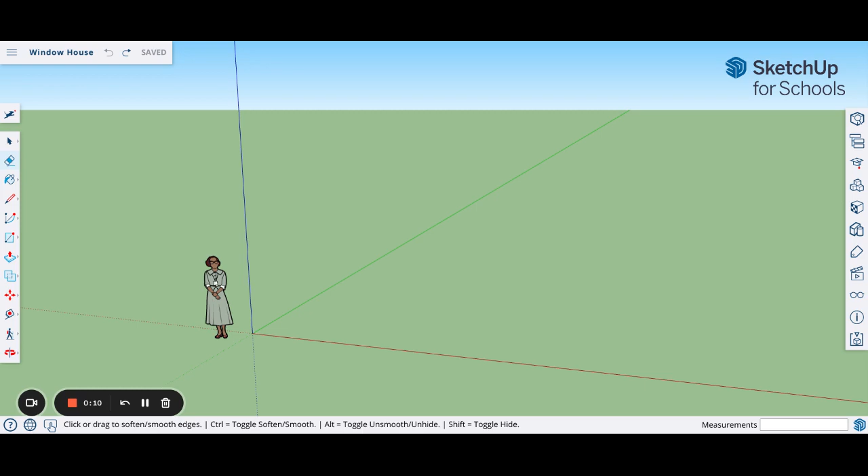We're going to get R for rectangle. We're going to start at our origin, click release, drag our mouse out, and place it again. And there's our rectangle for our base.

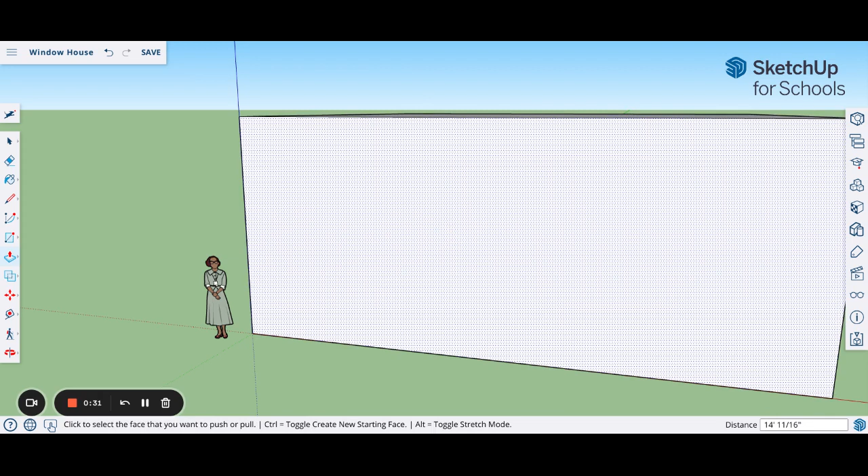We're going to get our P for push pull. We're going to click on that surface, drag it vertical again, and place it. Next we're going to zoom out a little, and I'm going to orbit.

There we go. Now we're going to get our arc tool, A for arc, that's a 2-point arc. We're going to click on this end, go in a little bit - yeah, that looks pretty good - and go straight vertical. If you're having a hard time going vertical, just hit the down arrow on your keyboard and that should inference lock it. We're just going to go till it snaps to a half circle. So there we go, there's our half circle.

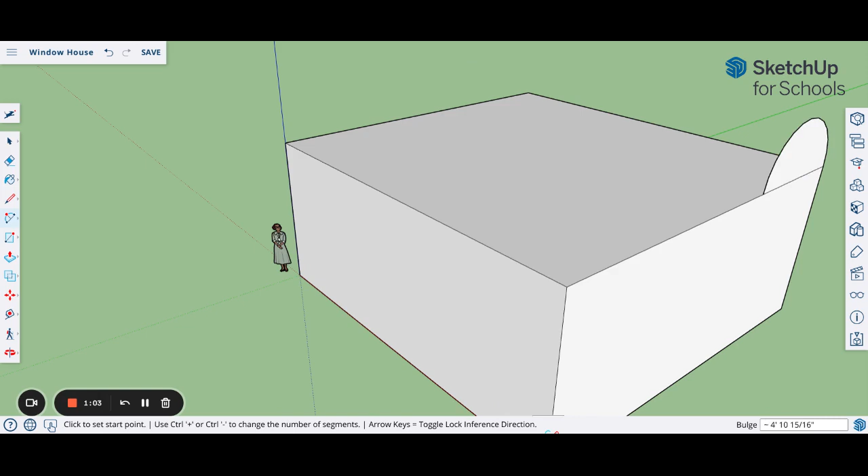We're going to click again. Next we're going to push pull again, and push that arc all the way across. We could try to line it up, but that's not going to be very accurate. When we go to erase our line from our roof, we're going to end up erasing a whole wall. So what you want to do is take that tip of the red arrow and line it up with that back edge or back corner somewhere that's in line with that. And now it's going to be perfectly aligned.

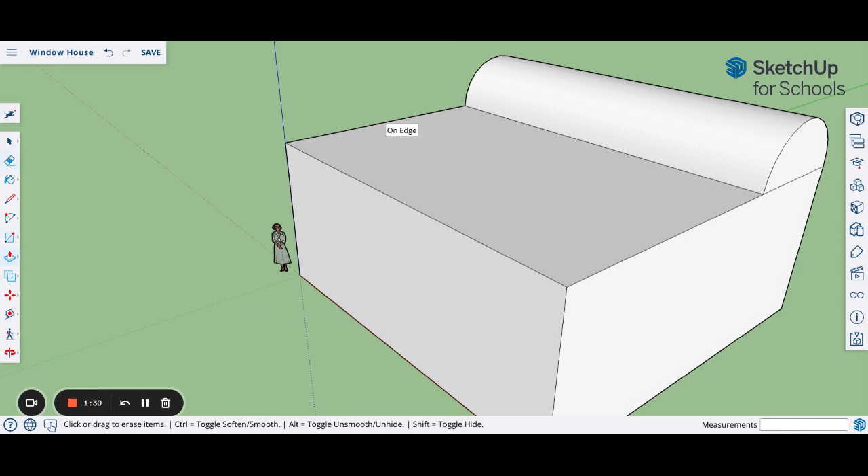So now we're going to get our eraser tool, E for eraser, and we're going to erase those end lines. Orbit around - this is where, if it wasn't lined up, you'd erase that whole wall. And that would be a good tip for you.

Okay, next thing we're going to do - this one gets a little tricky - I'm just going to push this front wall back because that looks a little bit different than what I'm imagining it to look like. So here we go. We're going to move this front line, this corner down, and we need to make sure that that's a straight vertical move.

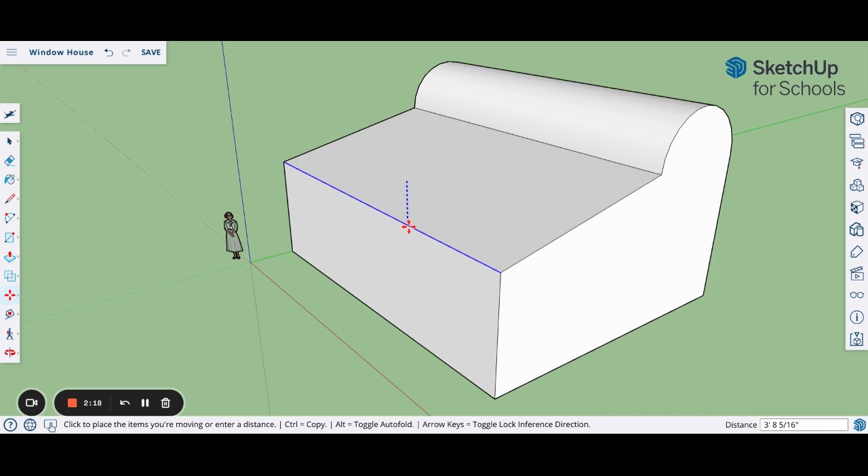So we're going to get our M for move tool. We're going to click on the line, hit the down key, and let's try the up key. There we go - you just need to move it, lock it to the blue axes. We're just going to move that down a bit so we get a bit of a slope. It's going to form our roof of this crazy building.

And as much as I love this person right here, we're just going to select her and then backspace to get rid of her. Okay, next we're going to zoom on in. If you have a hard time zooming, you can also just go Shift W, that's a shift window, and we're going to shift window so we can see this corner a little better.

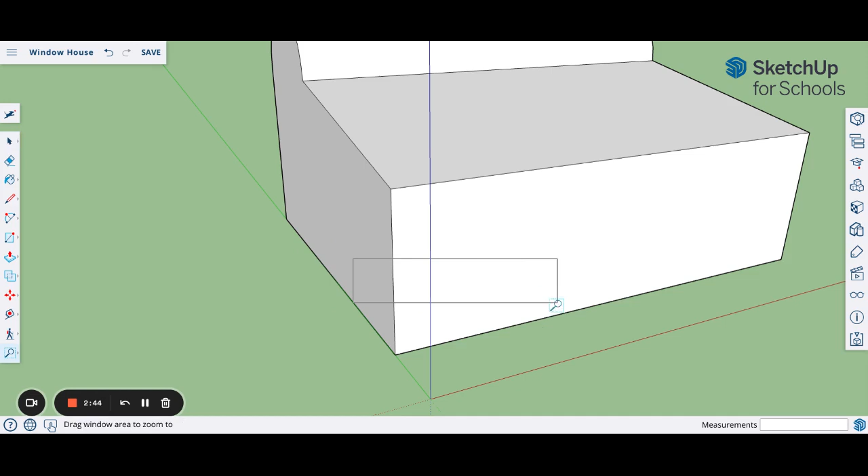There. Next thing we're going to do now is we're going to type C for circle. So somewhere near this corner we're going to click, drag that out - that's going to be the outside of our window. Now we need to make concentric circles, so that means using the same center point. We're going to drag it out, and there's our other one.

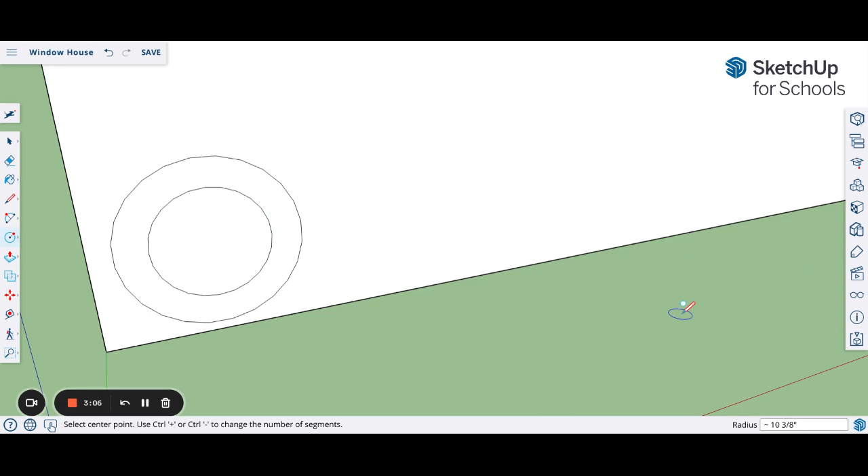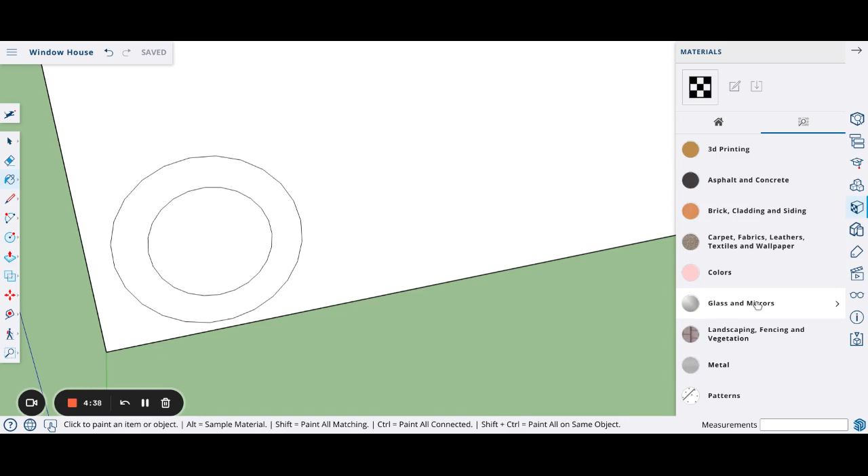Now we're going to introduce you to the paint bucket, B for bucket. We have these stock colors here, but what's more fun is if you go into the more specific patterns that are here. We're going to get into these specific patterns. We could go with colors for this, but just to keep it more fun, I'm going to go with a wood border, which is kind of neat - not entirely realistic, but there we go. We got a wood pattern.

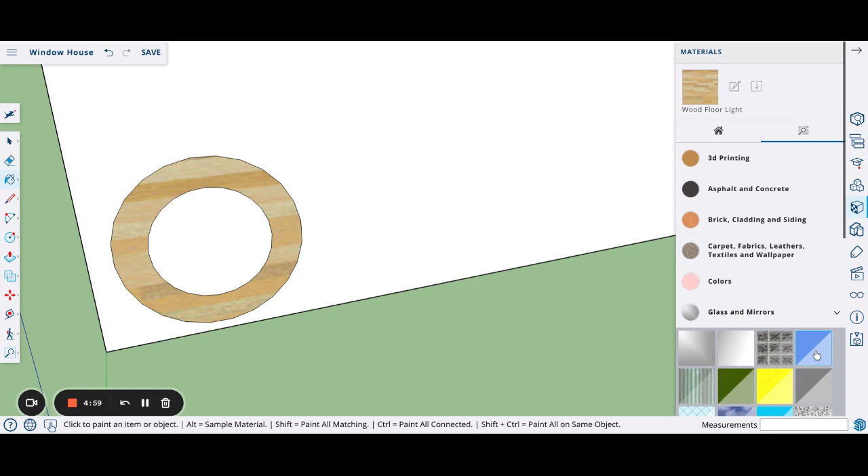And then we always want to place the middle one with our glass, so under glass and mirrors. I really like this one because it still shows through and you can see the inside of the building and so on. There we go - okay, so we've made our first window.

Now the issue is that when we select it, only one part of it is selected. So we need to triple click it. And you notice then that the wall is selected. Well, we don't want that either.

So one way that you can select only specific items is that you draw a box around it. Anything that's completely inside that box, so you go top left to bottom right, will be selected. If you go the opposite direction, then anything that touches that box is selected. So here we go, we're just going to select everything inside that circle, the window, and there we go.

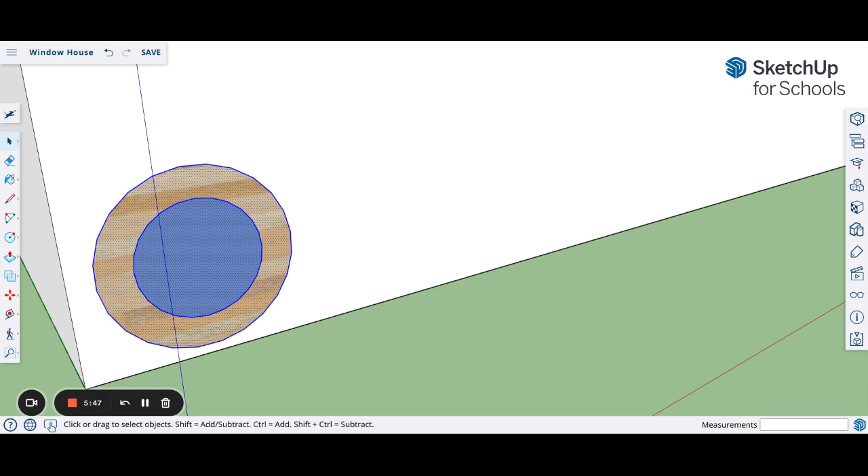Now we're going to type G, which is to create a component. We're going to leave it as the default, just call it component 1, any works great, and just say OK.

Next thing that we're going to do is zoom out. We've had a little bit of glitching lately with this in our class, but that's okay, seems to resolve itself as we move along with the assignment.

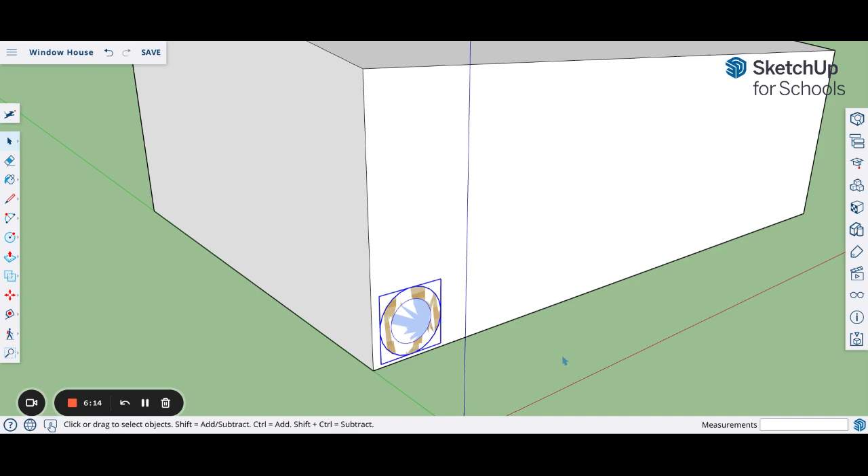We're going to now try to copy this. We're going to go M, and there's our move tool. We hit Control, and we get a little black plus symbol by it, which means it's now copy. So we're going to copy this all the way over, close to that end, try to make it look even. Looks good, place it, and this is an array.

So if you change your view or anything, this whole sequence needs to happen all at once, and if you change your view or anything like that, it kills the sequence and you have to recopy and start again. So we're going to go divide, and we're looking at our measurements bar down here to see that. Divide, and we're going to divide that space into, well, I think we can fit about 8, so I'm going to go divide 8.

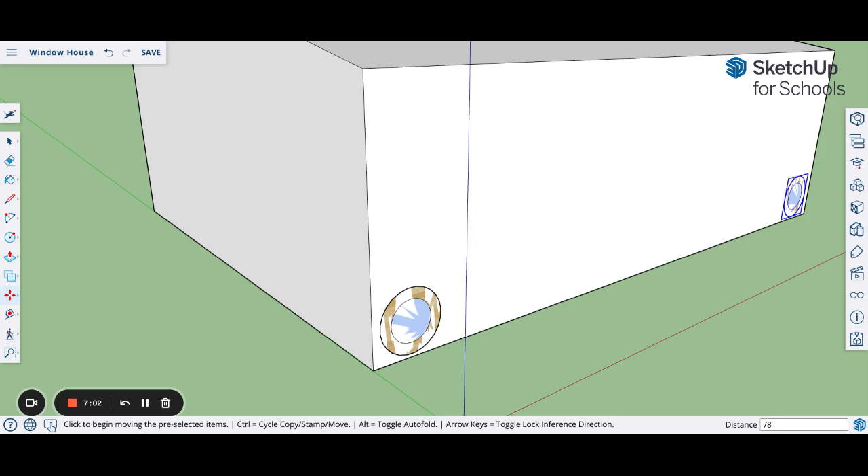There we go, that looks good. Maybe could have fit one more, but that's all right.

Okay, now that we've got those there, we're going to get our space bar, get our select tool. We're going to hold Control, and we're going to multi-select. You can see that we're multi-selecting as we go.

We could also be painting the walls and everything right now, which isn't a bad idea, but we're going to do that a little later here.

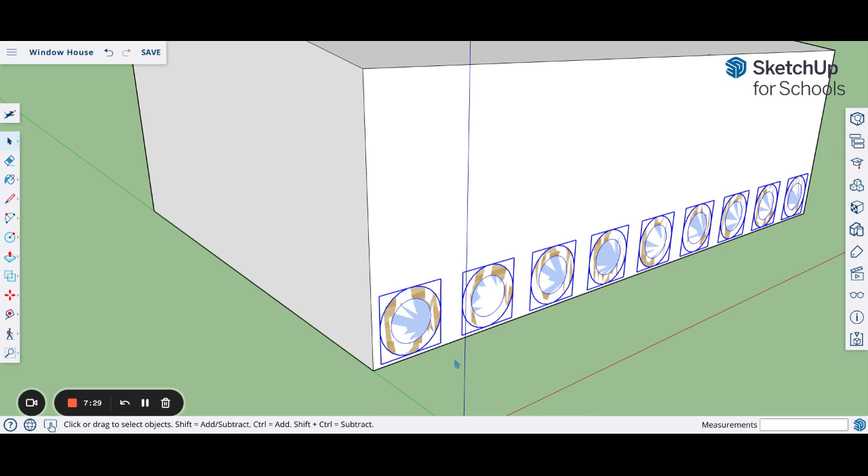So now we've got those selected. We're going to get our move and then Control for copy. We're going to copy all of these straight up, and we're going to repeat that once again. You see it says on face, which is what we want. So now we're going to divide 2, and that should give us 1 row in between. Enter. There you go. All right, so we could do the same thing again.

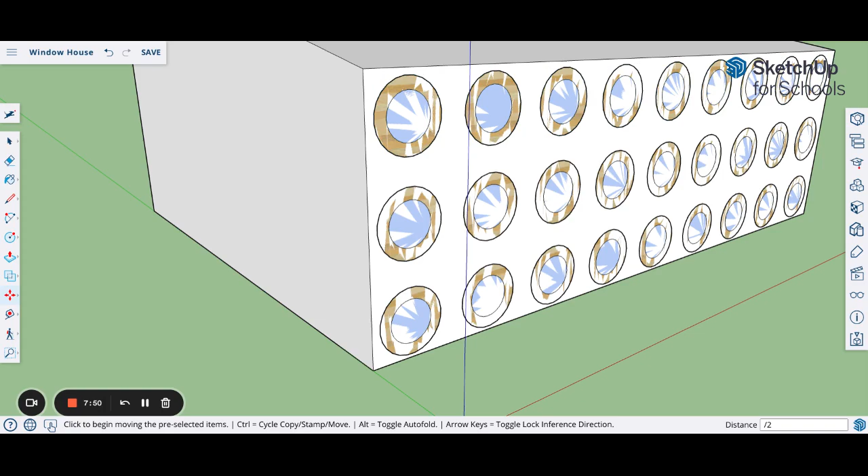We want to get these windows up onto the roof. So what we're going to do is get my hand tool or pan tool, which is H, and we're just going to click and drag that down so I can see the roof and that front wall. So we're going to get our space bar once again, and we're going to hold Control.

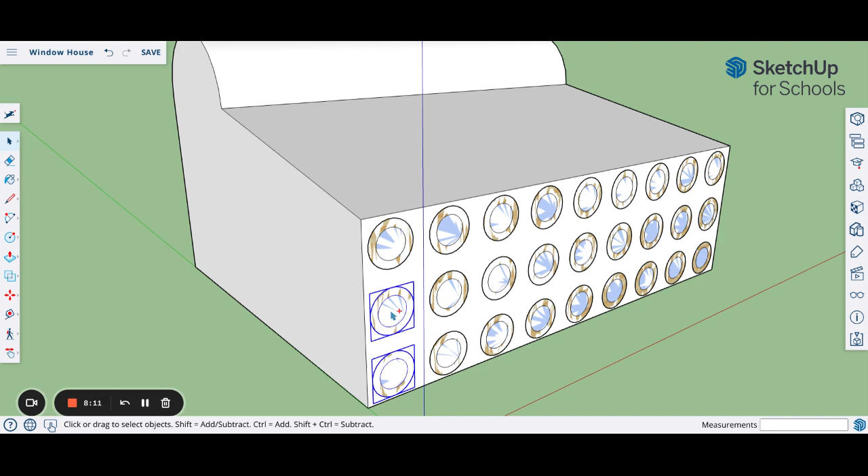We're going to select all of the windows that we want to copy up, and we're going to try this. Sometimes it glitches a bit and can't really get it to work quite right, but I have a strong inkling that it's going to work this time.

We could also draw a box around this, but sometimes you risk selecting items that might be behind, like some short wall lines and things like that. So this is kind of the safe way of doing it.

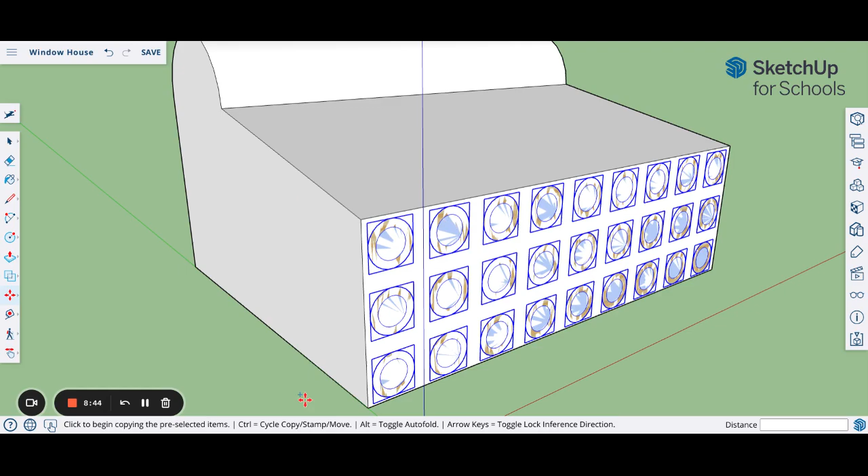We're going to hit Control again, move Control. We're going to copy this. So I'm just going to grab onto this corner. We're going to place it up, and it should automatically snap to that roof. There we go. Now, you might notice that there's still some more space up here.

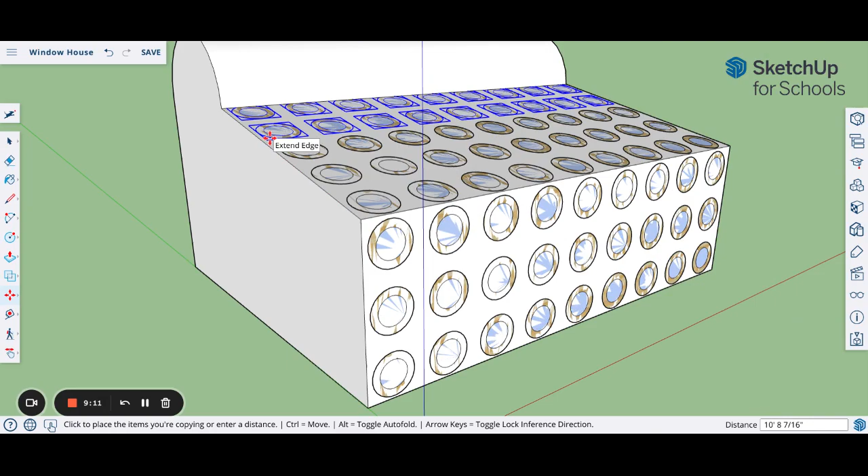So while those are still selected, I'm going to Control again for copy, and I'm just going to copy another row up. Come on, little fella, flip. There. If you are struggling with that, you can change your orbit, and usually that does fix it.

Now, we might have some windows that are going inside that roof, so I'm not really a fan of that. I'm just going to move these down a bit.

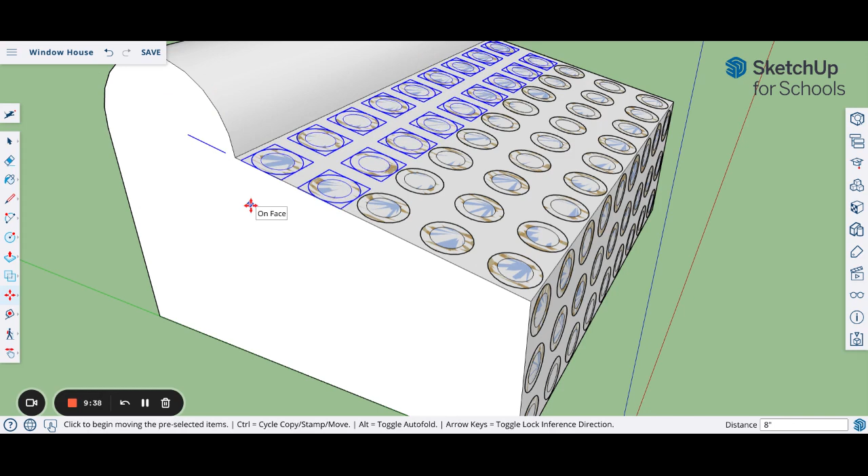There we go. You can also see that there's something inside here that we don't really want. There's something called X-ray, and if you go to this search tool, you can type in X, and we can turn the X-ray on.

The other thing you can do is set your own shortcuts. Just click in this box, type X, and now that's our shortcut. I'm just going to show you what that might look like. I'll click here, type X, and we can see inside.

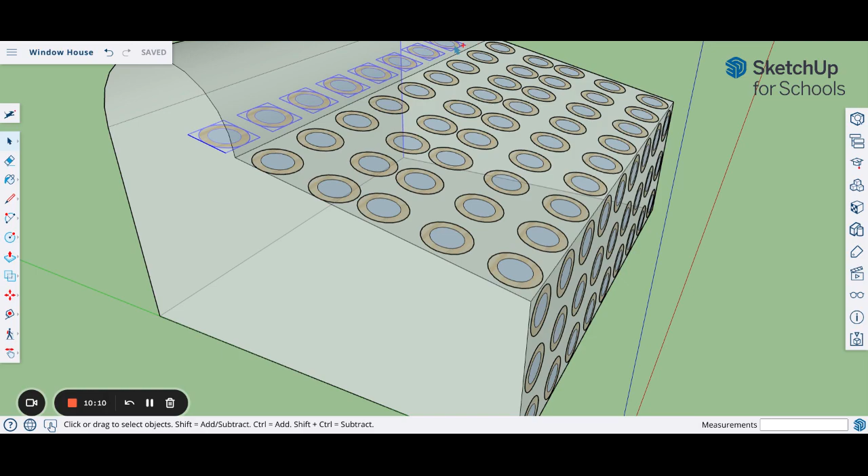Now we can select those windows that we don't want and get rid of them. We can backspace them, then turn our X-ray back off. Okay, now that we have our windows up here, it's looking a little goofy, but just for this demonstration we'll leave that. Next, I'm going to go Control-Shift-E again to get everything into view.

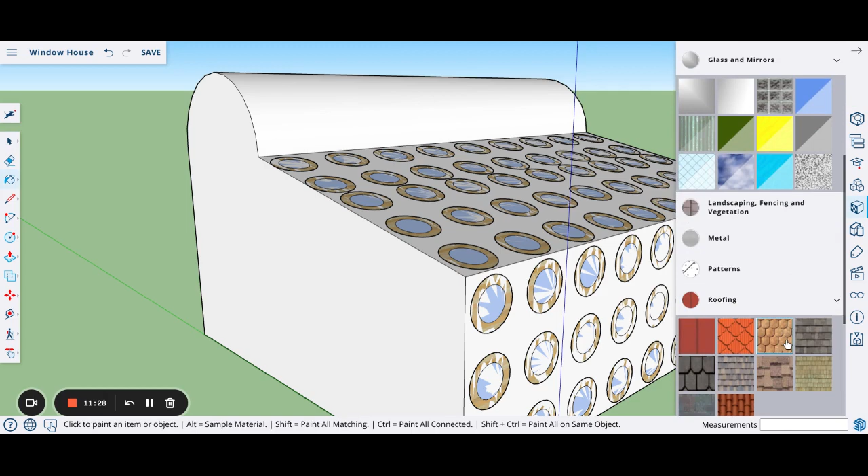Maybe let's paint everything, so let's go with B. Like I said, this could have been done pretty much any time. I'm going to go with roofing. Let's go - that's kind of a style I would never see around here, so let's put that on. That looks cool, like a clay roof, or maybe this one. There we go, yeah, I like that a lot better.

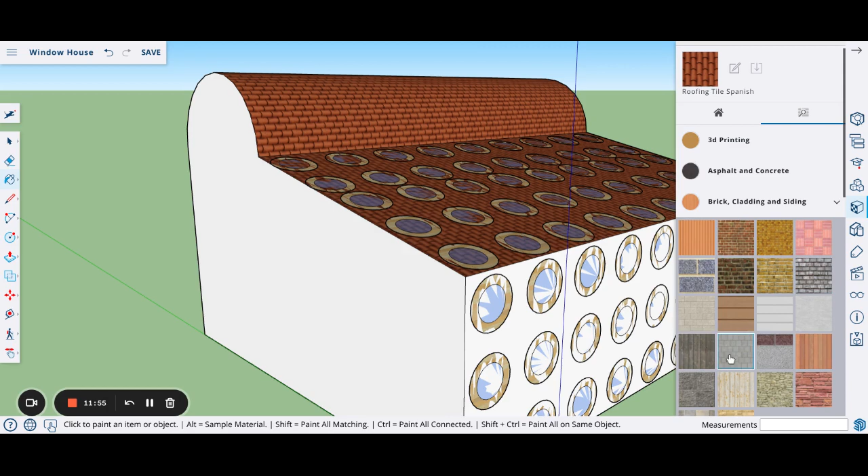Now we're going to go back and find some siding or brick. There we go, brick cladding and siding. And I think something that would go with that is maybe a bit more like this color - might be too brown, but there we go.

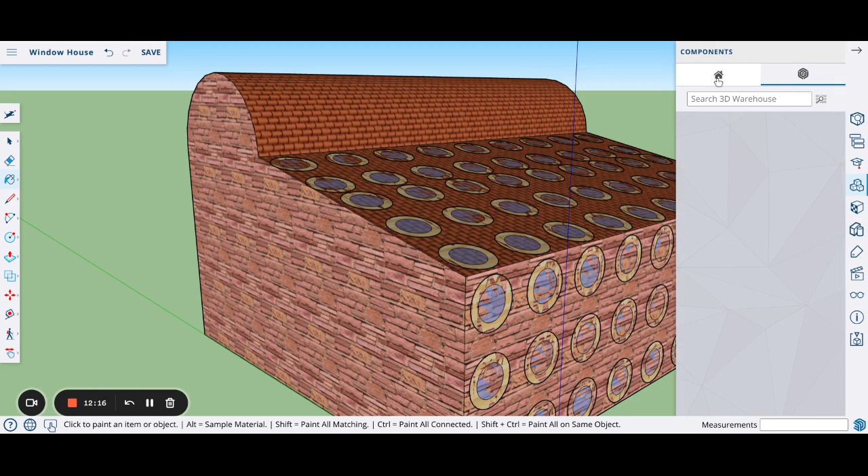Okay, now we're going to put some windows down this side. So we can either copy one of these, or the other option is if you go over to your components in the side panel and click on the house, anything that are components in the model will be there. So I'm just going to place one.

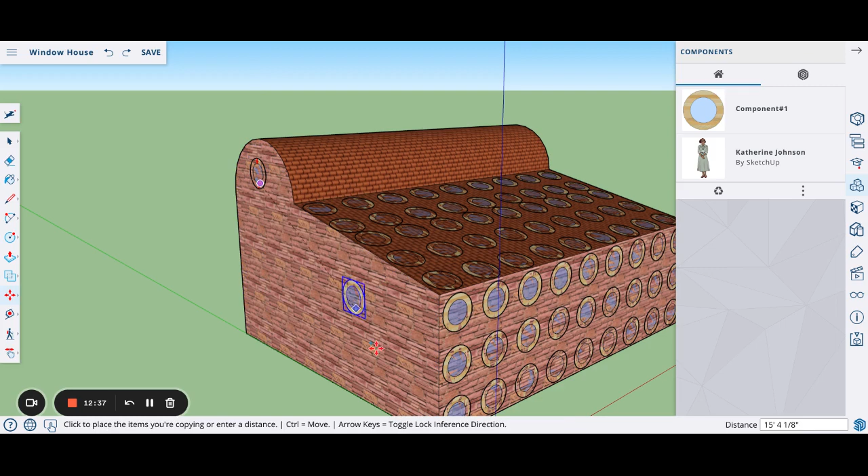I'm then going to get move copy. I'm going to zoom out a bit. I'm going to copy that again down to this corner, and I'm going to do another array. So divide, 7, enter - there's our windows.

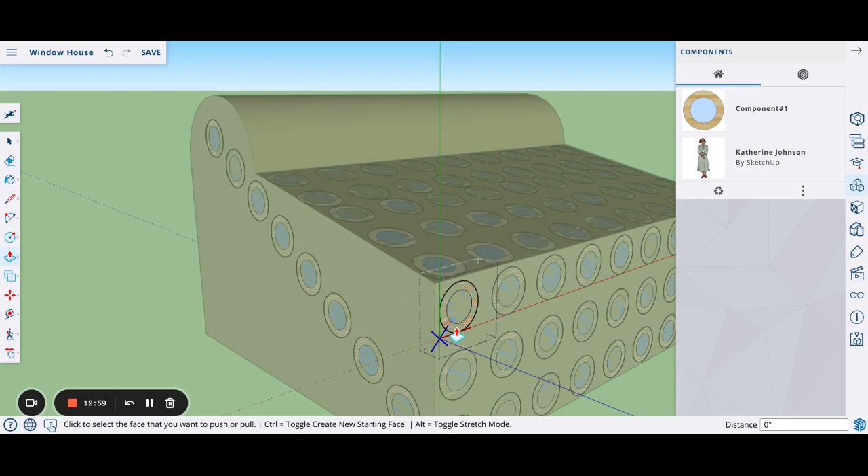Now we need to change these windows a bit, so we're going to edit one. We're going to push pull. There we go, we're going to pull those edges of the window out. So that should work a lot better.

Next thing that we're going to do is make the roof ones a little bit different. I'm just going to get rid of this side panel, we're done with that for the moment. So once again, it's kind of annoying, and maybe we should have done this when these were all selected before.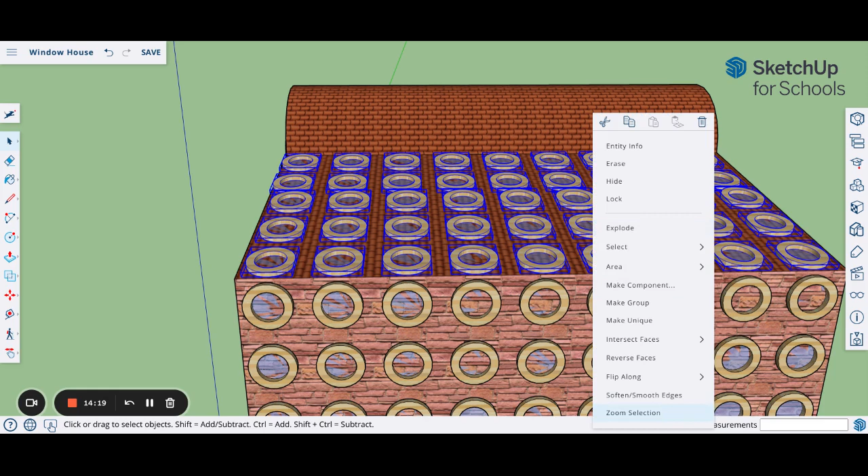Now that we've selected all these roof windows, we're going to make those unique, so there's things we're going to change to those that we don't want affecting the others. So we right click, or double tap on your trackpad, and we're going to find make unique. There's make unique - so now any change we make to these shouldn't change the others.

So we're going to edit one of the roof ones and see how that works. I'm going to zoom on in, and we're going to get our line tool, we're going to draw a line.

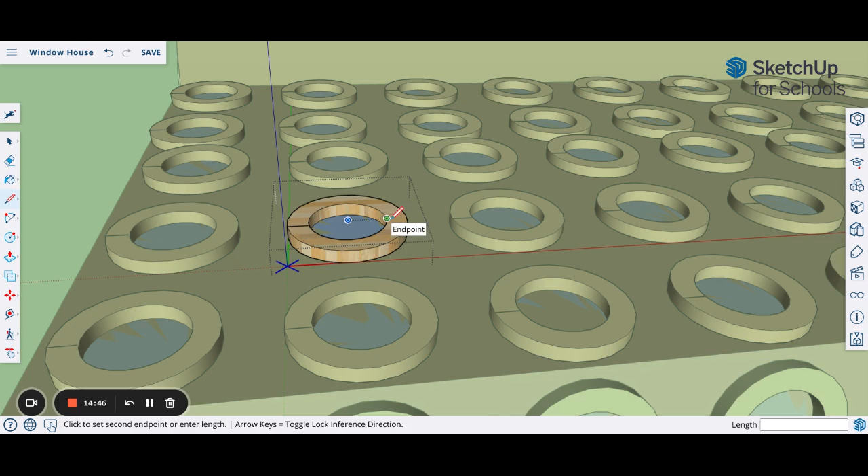We're going to make some shades on these. So there's a line, and you can see already that what I'm doing to one of these is doing to all of them on edge. Now let's see this work. There we go, and now we've got some shades.

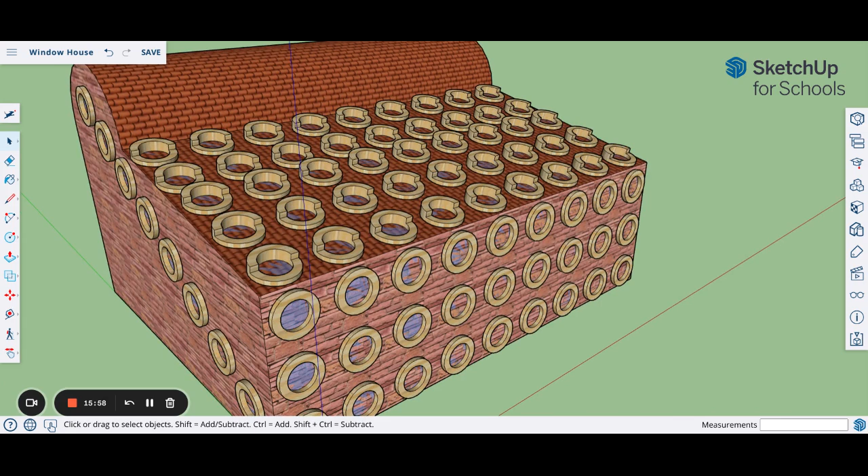And if we go Control-Shift-E, all of the roof ones should have that. We hit our space bar, click off to the side, and that is the finished window house project. So I'm just going to shift that again, and you can see that.

Now if you go to print, we just go to our print icon, so Control P, or you can go to the three lines in the corner, and I think it'll look better with a white background. And you notice that we've got those axes there, so before we print a PDF, we should go back and remove those axes.

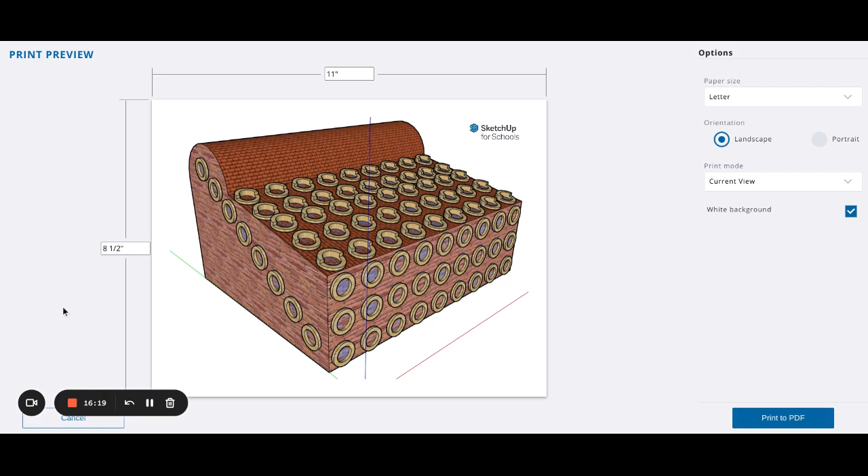So we're going to cancel this, go back to the glasses, and we're turning off our axes. And when we go back to print, everything should look perfect for printing. And that is the window house.